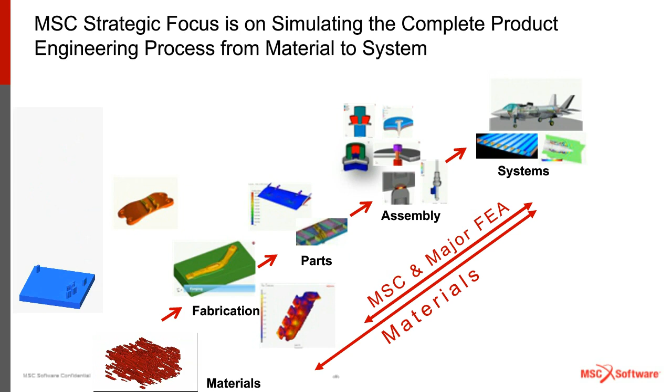Part of MSC is part of Hexagon Manufacturing Intelligence, and so we understand that the comprehensive AM workflow is not just building a part, it's not just designing a part, it's not just testing a part, but it's several steps that have to be taken consecutively, and as well with iterations, including developing the part, the topology optimization, selecting the right materials and machines, having the part printed right the first time, as it's called, also being able to then consecutively or consistently print those parts or build those parts to be able to achieve quality parts over time, and then also being able to measure accurately and consistently measure and then track the data that goes along with that.

To be able to validate that what is designed is truly as it's being built. And in the center of the wheel, you can see all of this is tied together with a material data management process. It's very important.

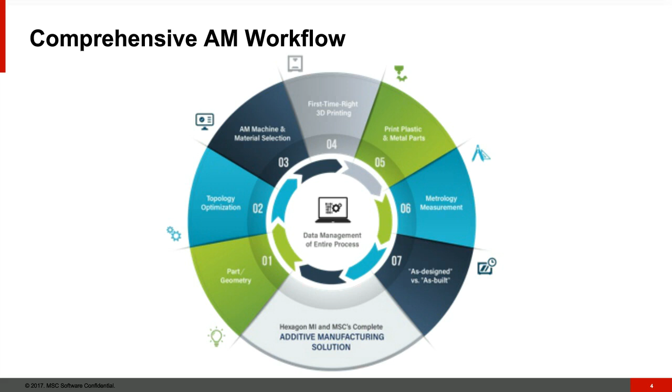Within Hexagon, the intent is really to combine all these best manufacturing technologies, and the simulation aspect fits into this loop. As part of this process, you start with CAD, then go through engineering, design, development, simulation onto the manufacturing process, which is covered by some of the other products offered by Hexagon, through validation, and ultimately through controls, statistical analysis, etc.

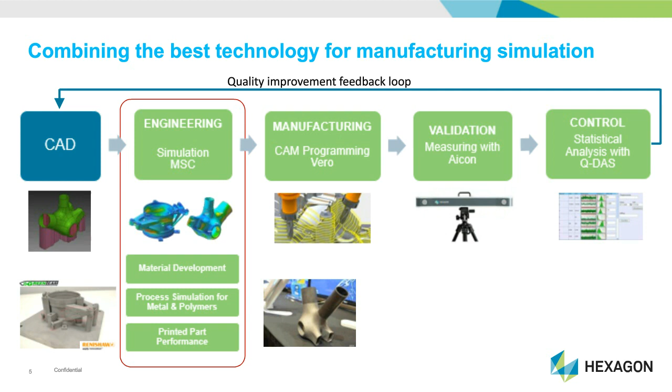Very brief background about SIMUFACT itself. SIMUFACT is short for simulating manufacturing. We focus on manufacturing process simulation for metal manufacturing processes, including metal forming, welding, and additive manufacturing, specifically focusing on powder bed fusion at this point in time. Development is still done primarily out of Hamburg, Germany.

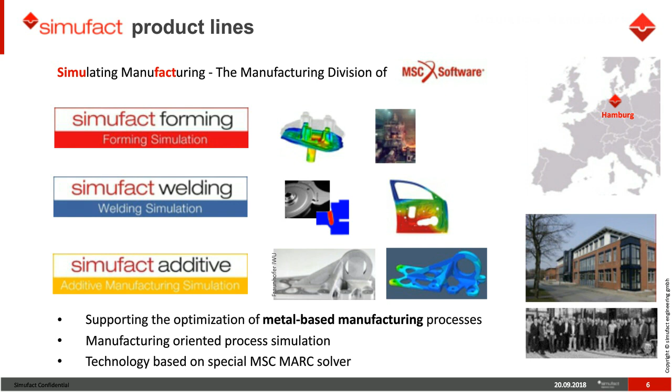Olivier, if you'd like to give a background on e-Xstream. Hi, this is Olivier from e-Xstream Engineering. I'm the business development engineer for additive manufacturing. e-Xstream Engineering is the material modeling company, about 60 people, essentially PhDs, all very focused on advanced material modeling. Our headquarters are based in Belgium and Luxembourg. We are developing Digimat, a platform made of different tools and solutions to model plastics and composite materials. We are the global market leader in multiscale modeling, with a very broad market leader position in automotive. We're working with most of the material suppliers on the market, and we're part of MSC Software and now of Hexagon.

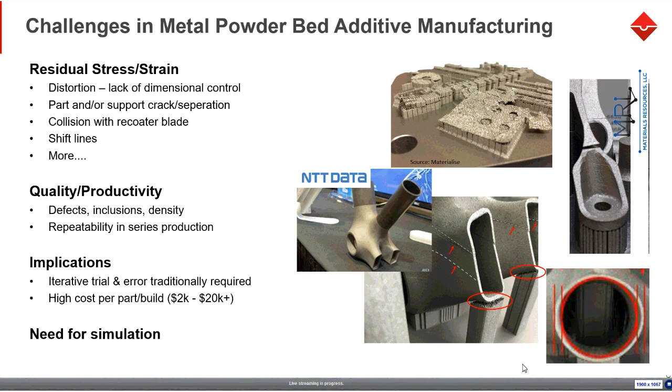Some key considerations within additive manufacturing process simulation, there are a couple of important aspects I wanted to highlight today as they pertain to SIMUFACT additive. The first is that SIMUFACT additive covers the comprehensive AM process chain simulation, in that we go through more than just the build, and I'll get into that in more detail. Secondly, ease of use, learning curve, and modeling time. Then followed by the calibration of the simulation to a physical build, based on empirical data.

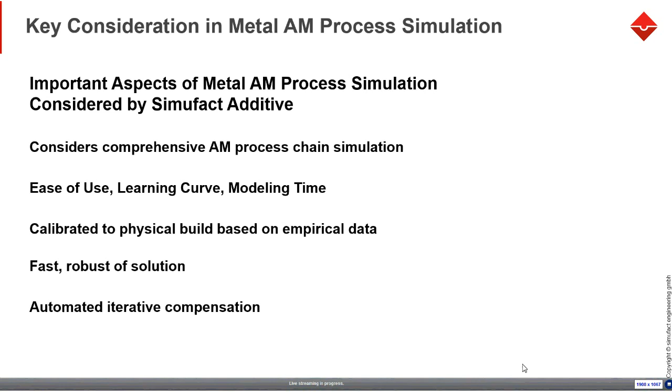That, combined with the fact that it's a very quick, fast, and robust solution. And finally, one of the more recent developments, the capability to utilize an automated iterative compensation routine to get your parts to the final desired, compensated geometry very quickly.

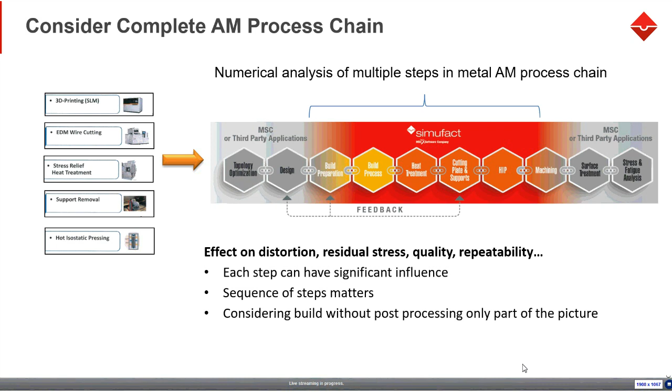So first off, we want to talk a bit about considering the complete AM process chain. We understand that the AM process is comprised of a number of different steps, and we can model several of these numerically. So not just considering the build, but also the unbolting or unclamping, the heat treatment, the cutting of the base plate supports, subsequent heat treatment and HIP steps, and then also the process that occurs after that. All these things can have a significant influence on the final part shape, and considering the build without post-processing is really only part of the picture. Oftentimes I say, I don't know a whole lot of parts that are very useful while they're still attached to the build plate.

So first off, considering the comprehensive AM process chain, as I mentioned: build, followed by unbolting, stress relief, cutting, support removal, as well as additional heat treat processes.

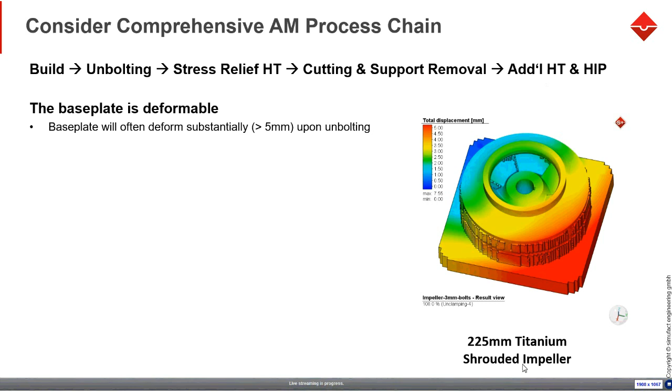This is a real phenomenon, validated by folks who actually built these parts. Secondly, you can't neglect or ignore the heat treat process. Parts change shape as a result of heat treat. They expand as you start to build and heat treat them, and after cooling they're not always fully annealed. The parts change shape, and by the time they expand and contract back down, they're not necessarily the same shape.

This is also affected by the fact that you may have a different material for the base plate versus the powder. A realistic example based on our practical experience with customers is a 1045 base plate with an Inconel 718 powder. This also enables us to optimize the heat treat schedule. Here you can see an animation of the part going through heat treatment. The stress relief has taken place, and as it cools down you'll see a significant stress propagate at the base plate. This is a result of the delta between the thermal expansion coefficient of the 1045 and of the Inconel.

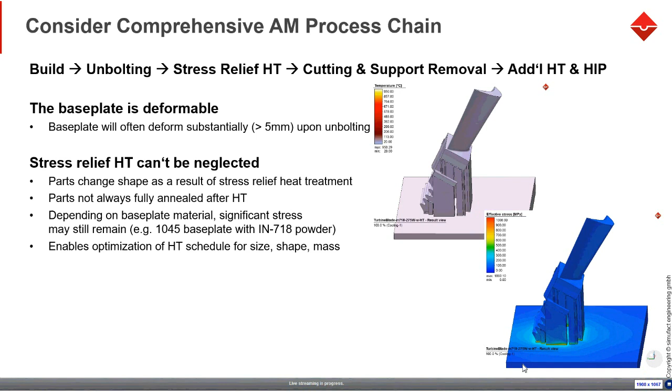Finally, the cutting and support removal. This is especially important when you're cutting prior to stress relief, which can result in significant deformation depending on how you cut the part. If you cut left to right, right to left, front to back, or some other way, it can affect the final deformation. You'll have localized plastification that's different depending on the direction of cut. This is also especially important for hybrid additive manufacturing machining applications that are becoming much more prevalent.

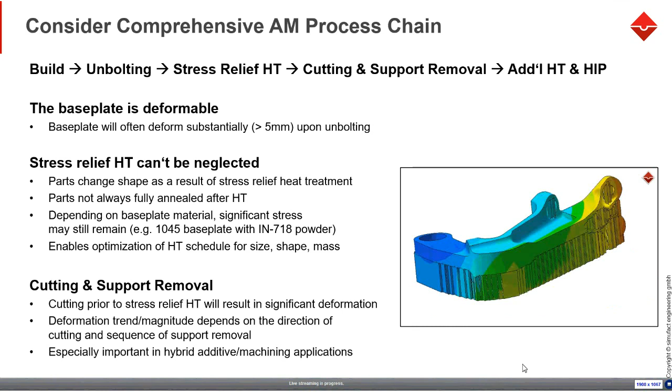Next we wanted to talk briefly about ease of use and modeling time. Our standpoint is that the ability to use this solution quickly and effectively, without requiring a specialist in CAE with a PhD in computational methods, and without having to de-feature the geometry or clean up the model, will really enable this technology and accelerate the modeling process.

In this case, we routinely see that we can model a process in 5 to 15 minutes.

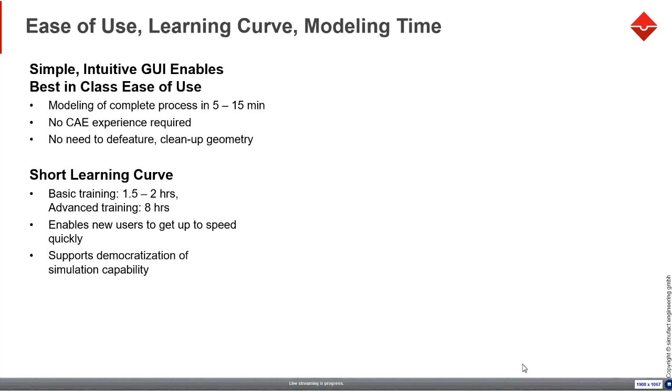Also a short learning curve. Basic training is usually a WebEx with me for about an hour and a half, and advanced training beyond that is another 8 hours, give or take. Some people never get it, and some people do, either by WebEx or in person. But this really enables us to get users up to speed quickly and supports the democratization of simulation capability. It makes it so that people close to the machine, with no experience in CAE, can readily utilize the tool.

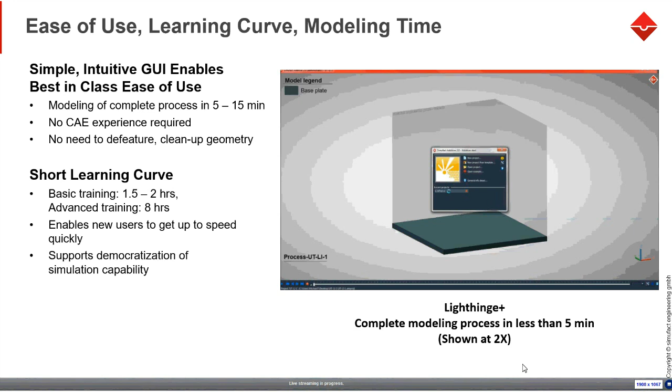Now I wanted to show you a very brief animation, about 2 minutes long, which will show that the modeling process can be completed in less than 5 minutes.

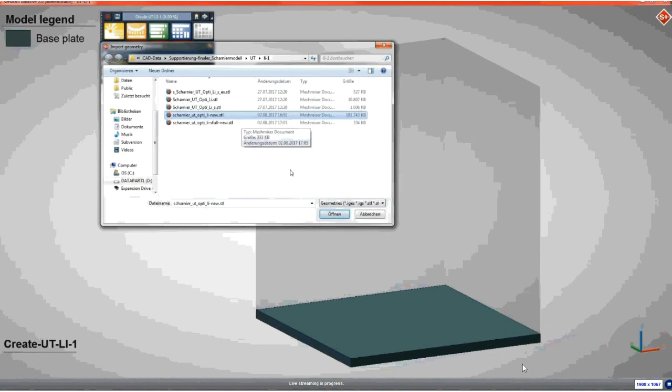So we're going to go ahead, starting with a brand new process, changing the name of the process, changing some of the setup parameters, changing the machine, and importing the part. You can use pretty much any kind of format to import the part.

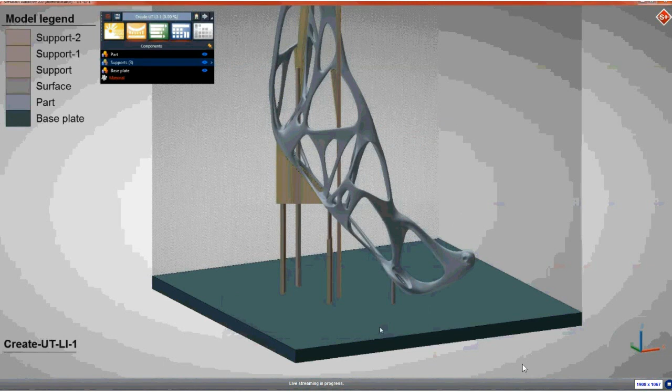The next step is positioning the part, and then importing the supports, or we could generate the supports organically within the software. It doesn't matter whether you're using your own supports generated in Materialise or generating the supports within Simufact. We can also consider the deflection and the thickness of the base plate.

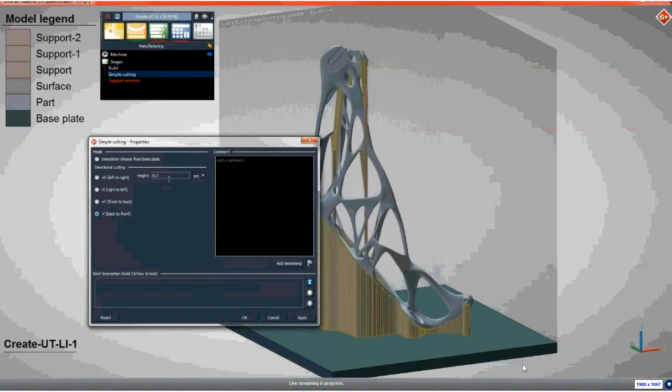Here we're selecting the powder. The next step is to apply the build parameters, the cutting parameters, and the support removal parameters.

Next step would be to create the voxel mesh, or the finite element mesh. In this case, we're using about a 1.5 millimeter voxel mesh. This takes between 10 and 30 seconds typically.

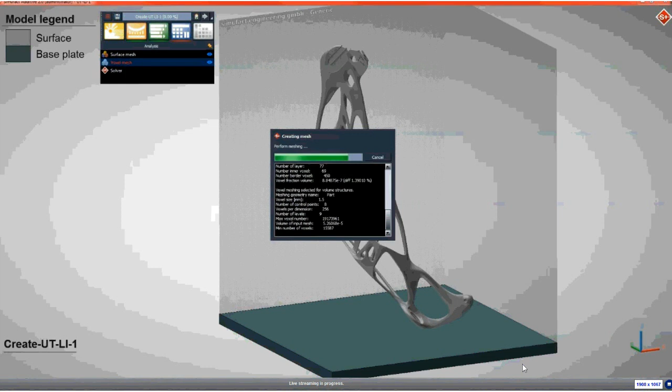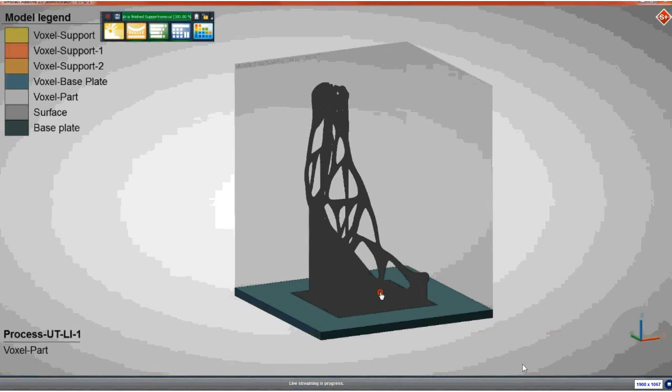Once we have the voxel mesh, you can go ahead and kick off the run. We'll talk a little bit about the solve time after that. You can see the detail of the voxel mesh applied. It's important to note that we're able to utilize a voxel mesh that's relatively large by comparison, and some of the numerical approaches we take allow us to use a larger mesh, which also supports solving these models very quickly.

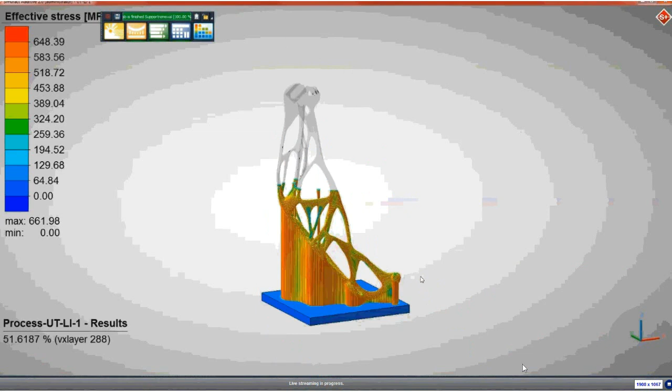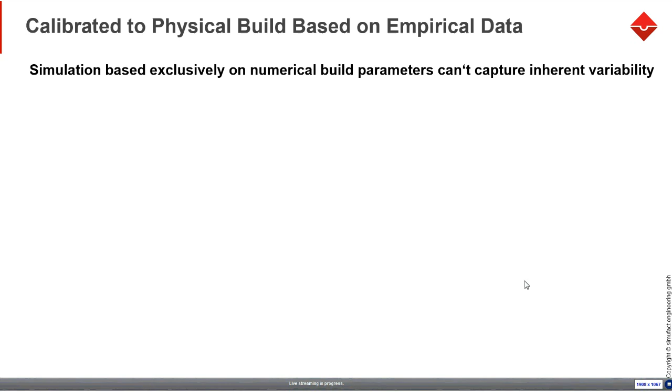The next thing I wanted to discuss was calibrating the simulation to a physical build based on empirical data. You might hear, oh, I have to create these coupons, and that can be a pain, but in reality, simulation based exclusively on a numerical analytical approach really cannot capture the inherent variability of the process. Some way to ground it in reality is critical.

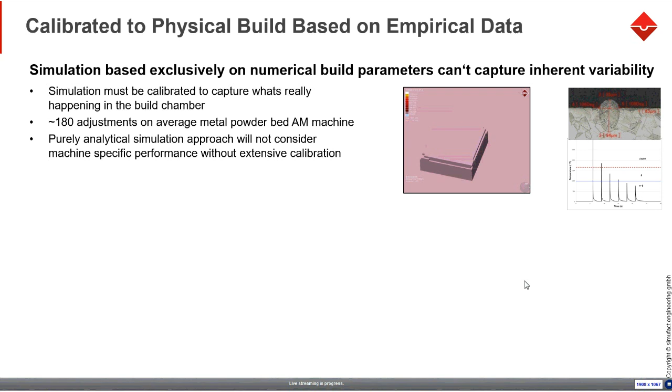With a typical AM process machine, you've got 180 plus adjustments, and the machines change over time. The analytical approach won't be able to consider machine-specific performance without extensive calibration. This is why we prefer physical test-based calibration. It's the fastest, most accurate method, and it considers everything that occurs within the build chamber. We validated this to upwards of 95% accuracy in blind studies with industry partners, companies you've heard of.

It's a simple process of building, measuring, cutting, and measuring again. It considers the micro variability that's inherent in AM, and that's one of the things that makes it very difficult.

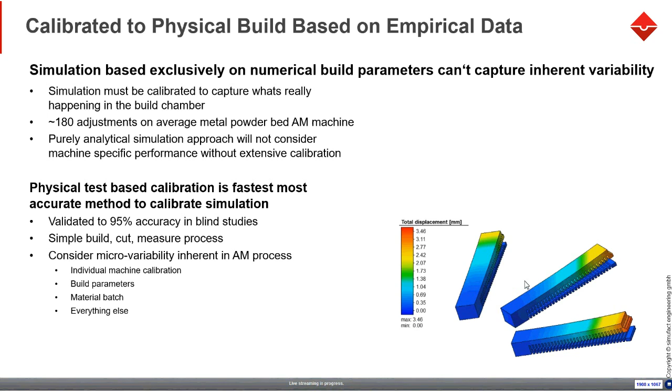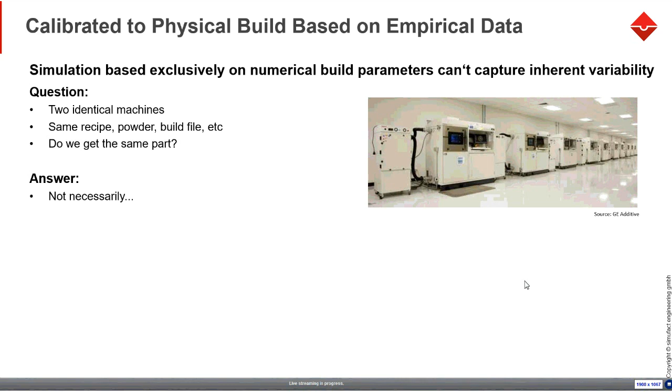What about the same part and recipe combination on two different machines in two different locations, an EOS and an SLM? What about an EOS in the US, SLM in Europe? Will you get the same part then? Probably not. But this empirical calibration is what enables us to build the same part across multiple machines and locations.

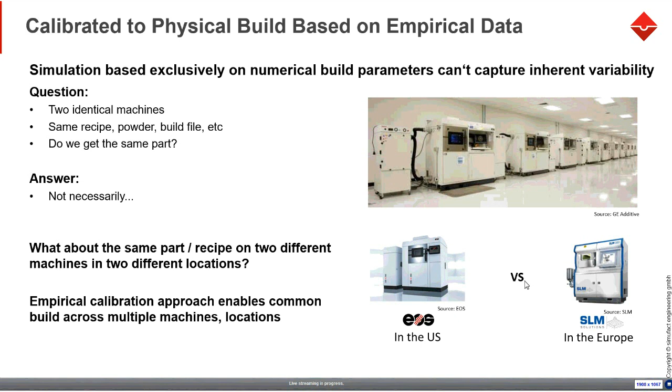I also want to discuss the speed and robustness of the solution, capable of solving very large realistic models. And I say very large—what is that? Something that would occupy the entire build space of an M400, an STL greater than a gigabyte with 1 millimeter size features. It can handle that kind of very large part.

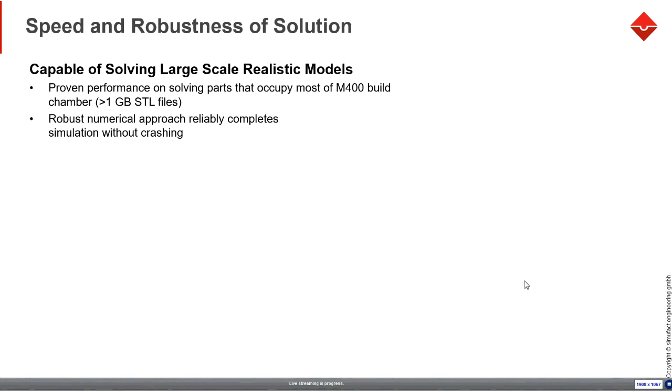This simulation will solve routinely without crashing. It's very robust in that respect, and quickly solves realistic part level simulations. A lot of times we'll see a simulation and people ask, how long did that take for that 1 centimeter, 2 centimeter part? Well, in this case we're talking small to medium parts, maybe 100 to 200 millimeters, solving in 15 minutes to an hour, including build, heat treat, cutting, and support removal. Large models, most of a 250 millimeter build space, take 4 to 24 hours.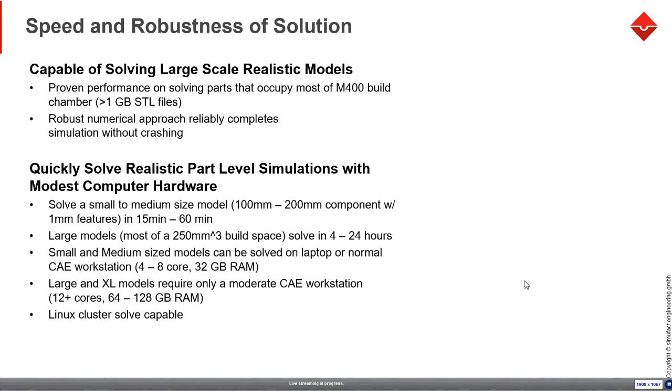Small to medium models only require a laptop or a moderate small CAE workstation. I solve all my models on a 4-core, 32 GB RAM laptop, and it works just fine. For very large extra-large models, you need 64 to 128 GB, and it's also capable of solving on a Linux cluster. Here you can see an example.

Again, I ran this on my laptop: a 260 millimeter Inconel turbine blade, the same model we saw earlier. Build, heat treat, base plate, cutting, support removal—1 hour, 24 minutes.

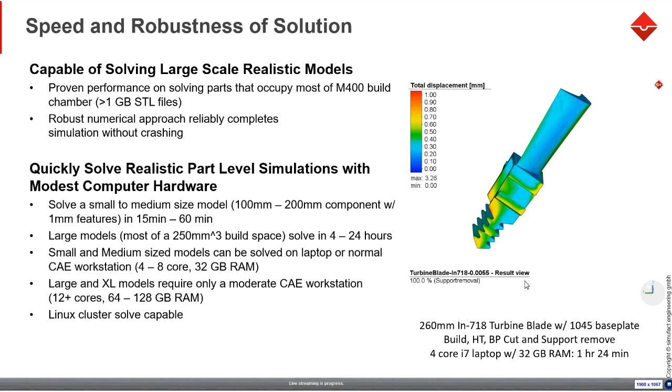The last topic I wanted to discuss is the automated iterative compensation routine. It's my personal opinion that compensation is going to become critical and an enabling capability that will bring metal AM forward. I make it analogous to the compensation of castings. We're able to predict the optimal shape, and in doing so, we want to build the part to nominal, rather than trying to build the nominal geometry as we've been doing up to this point.

Some areas within the geometry may require more or less compensation, and this is what drives the need for an iterative compensation process, something that's more than just a one-step approach.

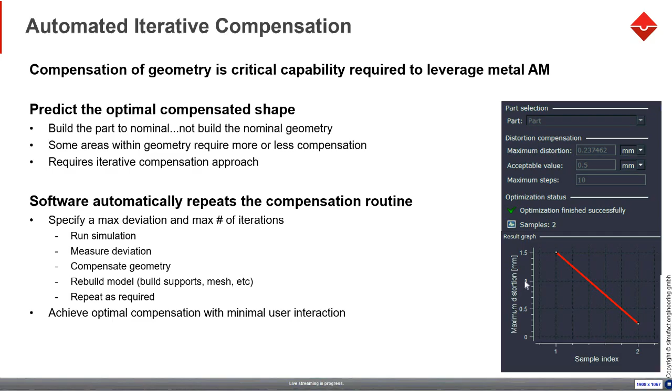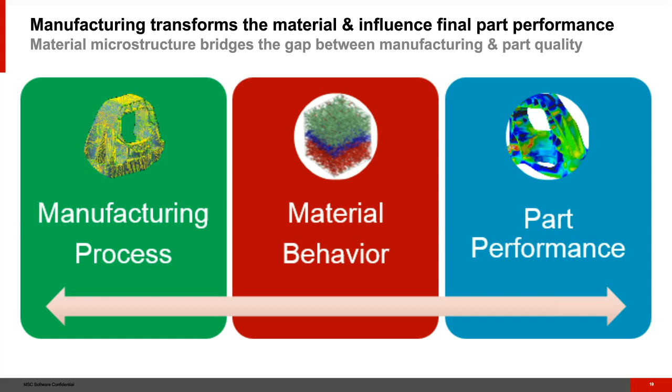We all know that manufacturing transforms the material and influences the final part performance. And so what we've been doing at Digimat for 15 years now is really connecting the manufacturing process with the part performance, via the material behavior and microstructure. Digimat is a material modeling platform to support industry composite-related needs and pains. You can have access to virtual testing, to deduce the composite material behavior based on the different phase material properties. You can ask what if I change the volume fraction of the fibers or of the porosity, how will it impact the mechanical or thermal behavior of the composite materials.

We rely on a very large material database, Digimat-MX. We're working with most of the material suppliers to build material models and exchange them between material suppliers and end users. We have different types of mapping solutions to transfer information from mesh A, from process simulation, for instance, to a mesh B, the CAE mesh. And we are interfaced with most of the FEA solvers on the market, MSC Software solvers like Marc or Nastran, but also third-party like ANSYS, Abaqus, or SAMCEF. And finally, we developed 2 years ago a process simulation module, Digimat-AM, to deduce the level of warpage and residual stresses of the part.

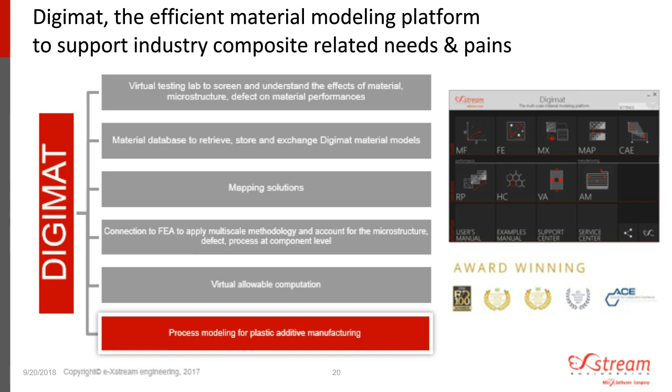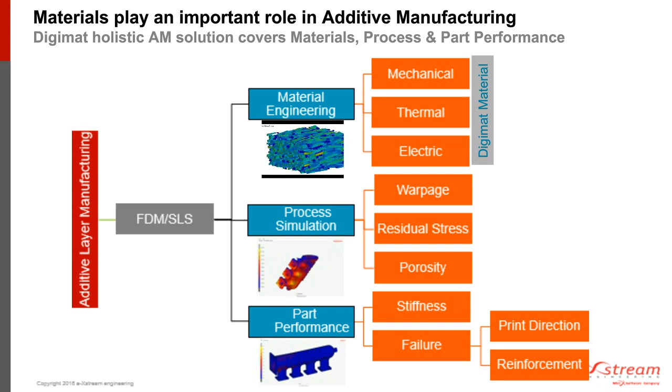So our solution is based on 3 building blocks: material engineering, process simulation, and part performance, because there is a very strong link between each of these, and for additive manufacturing, materials play a very important role. The aim of material engineering is to predict the mechanical, but also thermal or electric material properties, because we are heading towards multifunctional parts with additive manufacturing. Process simulation for FDM or SLS processes aims at predicting warpage, residual stresses, but also the as-printed microstructure such as porosity or related effects such as crystallinity. And by combining material engineering with process simulation, we can predict the end part performance, so stiffness, but also failure, which is often print direction or reinforcement dependent.

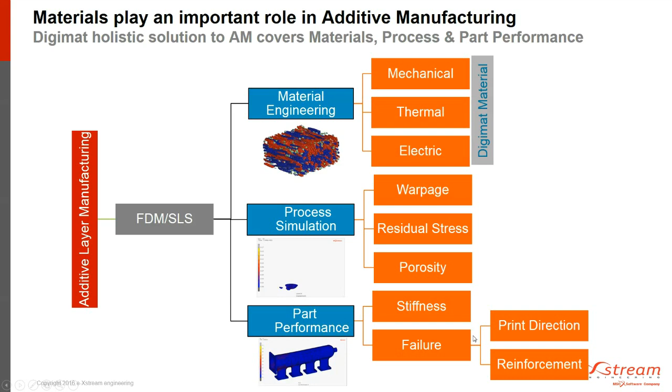We have developed very advanced material models for injection molding, but also for additive manufacturing, where we account for the specific and complex microstructure resulting from the additive process. We have built up the mechanical behavior of lattice microstructures, and we are also investigating multi-materials such as Stratasys PolyJet, where we can directly deduce the overall stiffness of the material depending on the volume fraction between a very soft material and a very stiff one.

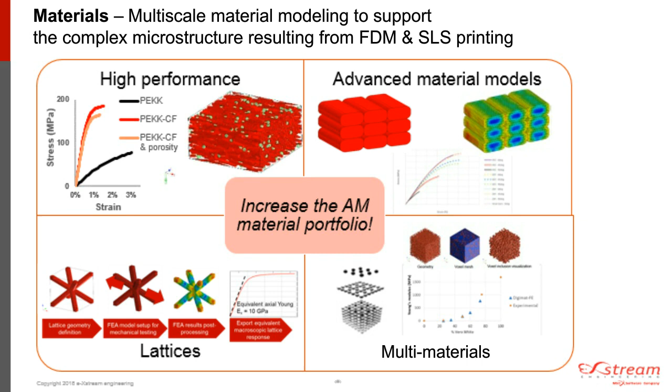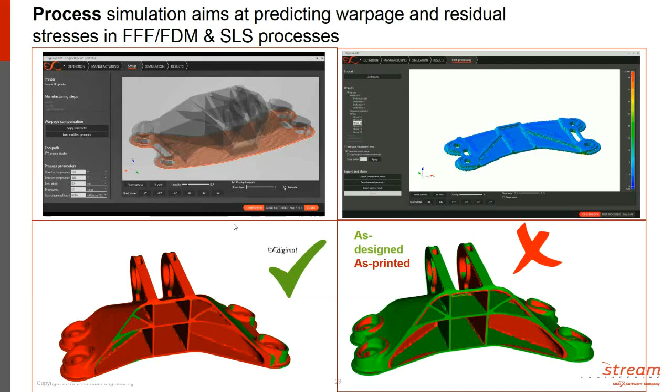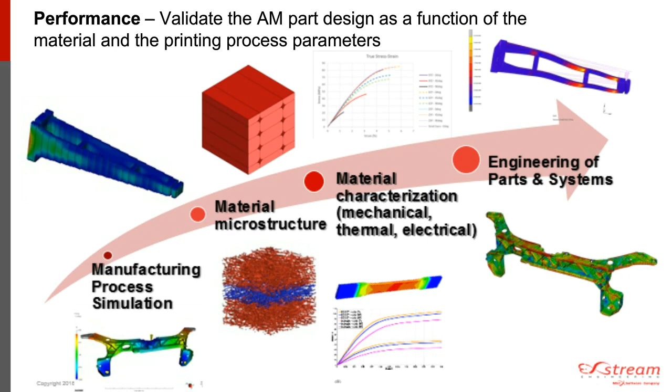So e-Xstream offers a unique database. So for injection molding, compression molding, and other types of processes, we are working really with most of the material suppliers. But for additive manufacturing specifically, we've been working with Solvay and Stratasys to develop some material models of different grades in FFF, like we do with Solvay KetaSpire. So this is a PEEK material.

But in FDM with Stratasys, we've been working at characterizing the Ultem 9085 that has been certified for aerospace, and also on the 1010, which is more dedicated to toolings. And with Solvay, we've also been working on the Sinterline grade for SLS process. Finally, we've been capable to characterize the Fortus 900, which is probably the largest FDM build size on the market, and that has a specific package for aerospace certification.

In the near future, by the end of the year, we will have additional grades coming from Solvay, Stratasys, and probably also more material suppliers, and some of them will then be loaded with carbon fibers or glass fibers.

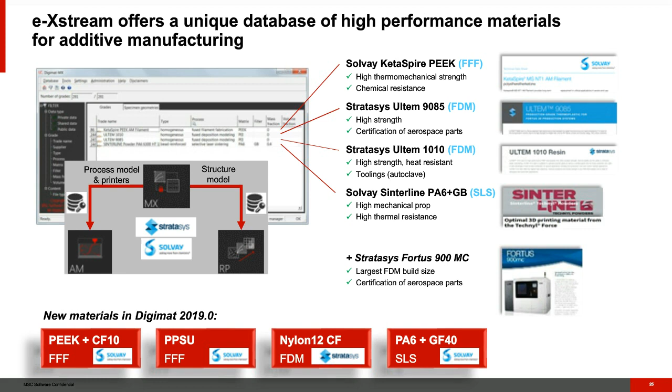So when we released our first Digimat version, we had a solution based on the inherent strain approach. This is very similar to what Simufact is proposing. So it's proposing essentially a very good compromise between accuracy and speed, and is essentially answering the question: will my build print right the first time? So what is the overall warpage trend, etc.

Now, with the latest release in July, we've enabled advanced solver simulation, which means that you can now perform a full simulation, thermal analysis or thermomechanical, taking into account all the different local features. For that, for instance, we can have a very detailed local thermal impact of specific areas, have some specific toolpaths like lattices, for instance, or predict the level of crystallinity in the part. So this is really the type of study that is ideal to first understand and then optimize the process, for instance, with the degree of crystallinity in the part, before physically printing the part.

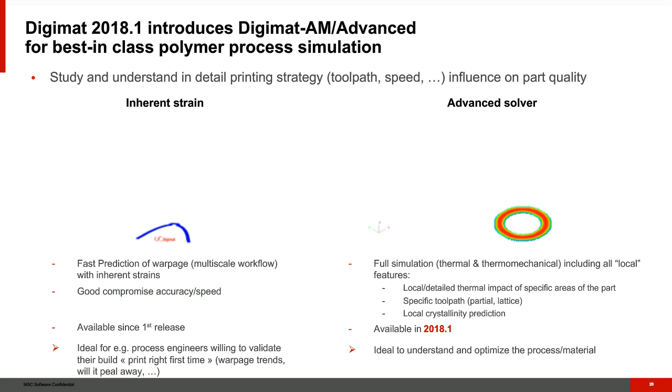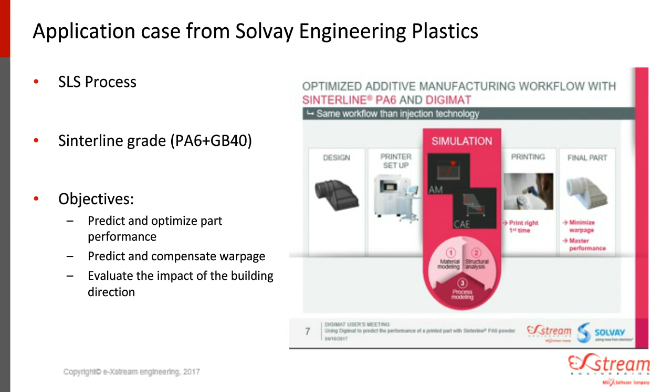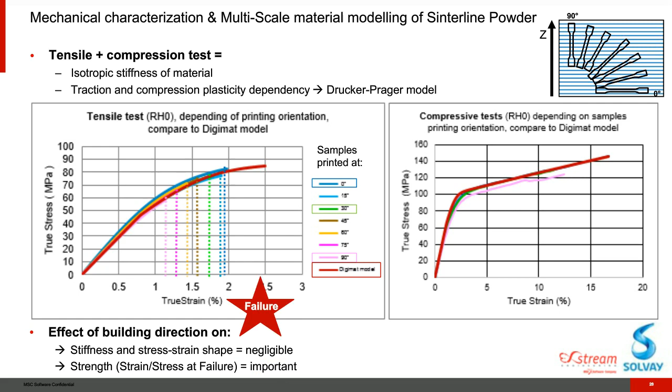So what we do is we characterize experimentally the mechanical behavior. We fit a Digimat model through the different curves, and what we can see is that essentially the building orientation doesn't really impact the stress-strain shape. But it does have an impact, and this is on the failure, so that the failure happens at very different values depending on the building direction. And so this is why we had to develop a new specific failure indicator that is aware essentially of the building direction.

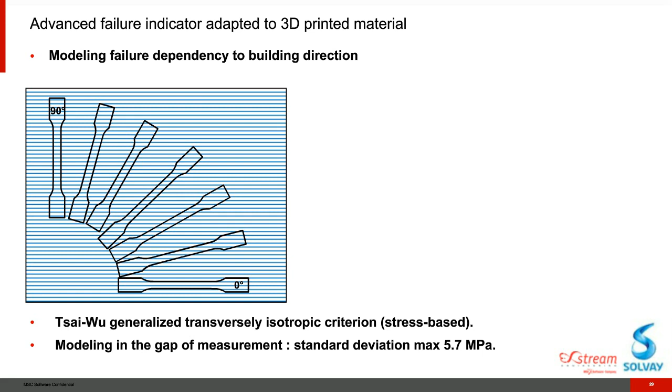To develop this failure indicator, we will reuse the different dumbbells printed and tested at different orientations, and we will then show that indeed we are capable, compared to the experimental curve in blue, to fit a Digimat model of the failure, and indeed we are decreasing progressively the maximum strength of the material with an angle that is increasing. So the worst condition, of course, in this case is when you print the dumbbell vertically.

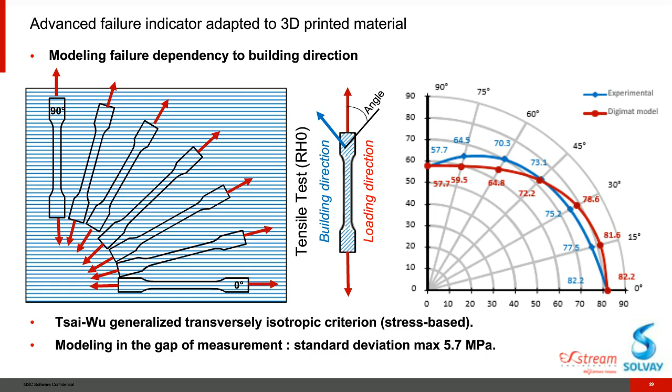Now that we have characterized the mechanical behavior of the material, we can perform structural analysis to deduce which orientation of the part is giving us the optimized performance. So in this case, it's the burst pressure, so we have to sustain the maximum level of pressure that we can, and to this end, we will see this animation that gives us the evolution of the maximum pressure that the part can sustain in function of the building angle. So from these results, we see that there is clearly a preferential angle at 0 degree or 180 degree by symmetry.

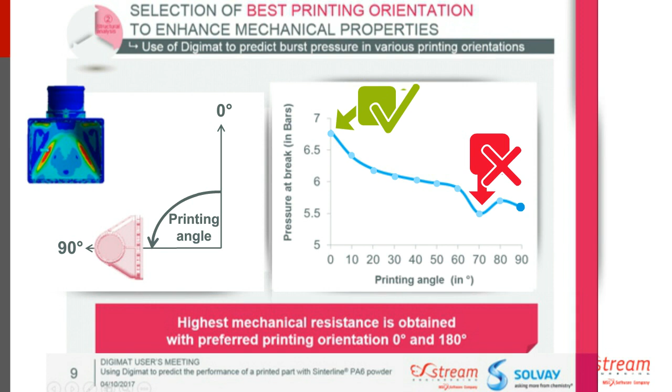Now what we have to do is to check that the design accuracy will be satisfied during the printing. So this is where printing simulation occurs, of course. For that, we will print the parts at the two different orientations, 0 degree on the left. So this is the animation that is played now, and 180 degree just afterwards on the right. There is one specific area of the part that we want to investigate, and this is the sealing area at the very bottom of the part.

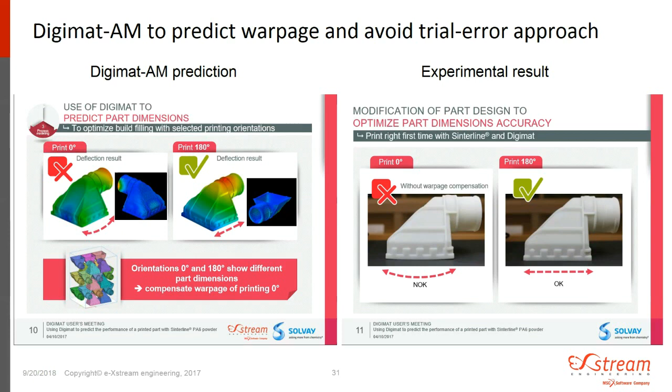And so when we print it at 0 degree, we can see that there is some warpage, as demonstrated experimentally on the right slide. So this is the famous banana shape that we have when we print a plate within the build. While when we print it at 180 degrees, essentially the first build is already correct. So we'll then use Digimat-AM to perform the process simulation and use those first results to compensate the warpage. And so on the right now you can see the updated results at 0 degree, where we have decreased most of the warpage that was existing on the first build.

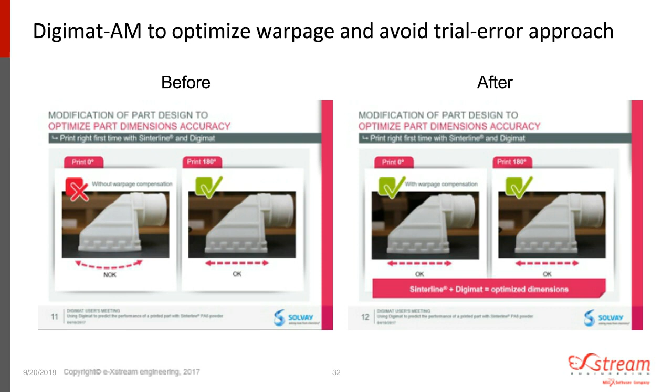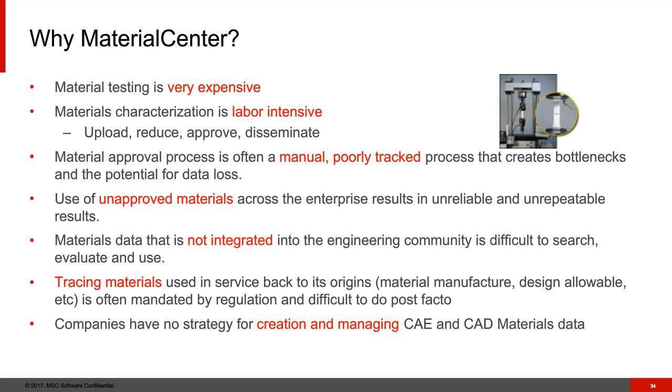I will now switch to MaterialCenter. MaterialCenter is essentially a tool that has been developed to address a given number of pains when we discuss material testing with a company. The first, material testing is very expensive and it's also labor intensive. The approval process is often manual, poorly tracked, and the use of unapproved materials across the company can result in unreliable or unrepeatable results. So all in all, about traceability, about linking all the people together, we want to offer to the market a material data and process management solution.

So for that, we will first start by loading some data. So it can be physical test data, of course, like tensile tests, but it can be specifically for additive manufacturing as well, process data or material parameters. This means that you can really follow up and include all the different data that are associated to the full simulation and the full additive manufacturing process. You can also envision to include some virtual data with Digimat, so the connection with Digimat VA. Once this is done, you can analyze, post-process, and reduce all the data, and all this is sustained by a very specific approval process, meaning that this is really an integrated platform within the company.

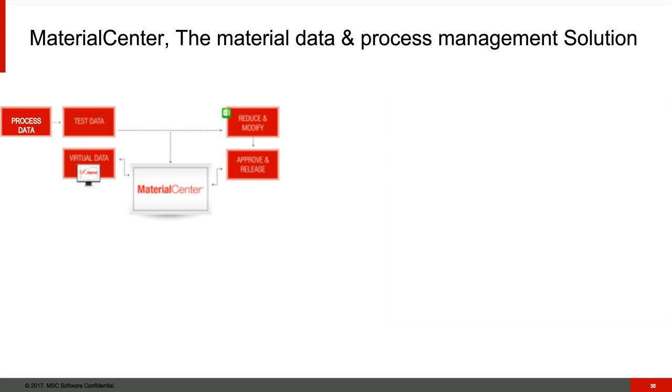Once the data has been approved, we can also start using them. So this is about exporting the data to Excel files. So we have an Excel integration within the tool so that engineers can work directly from the Excel interface, download the data, modify them, publish them, and also create some specific templates.

You can also export the material data for CAD, like CATIA, or for CAE, like MSC Software, Patran, Marc, but also Abaqus or ANSYS. And finally, you can publish the data towards a PLM interface, or just create reports and email the information.

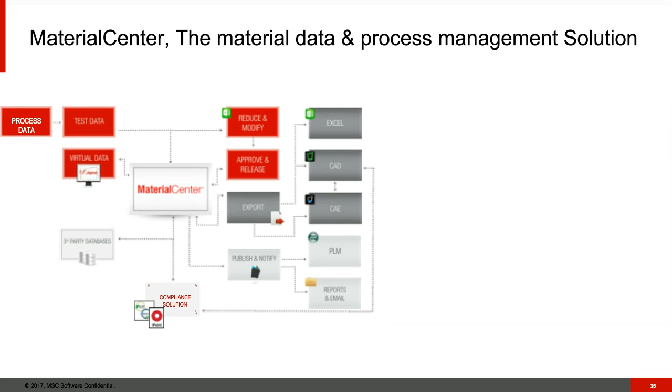Finally, and last but not least, we have a compliance solution. So in partnership with iPoint, we want to be capable to produce data that are REACH compliant. So specifically for additive manufacturing, MaterialCenter will enable you to capture the full AM data, so about the material, about the build, the process, the machine, even the environment of the part, in one unique centralized platform.

Okay? So you can capture the full manufacturing process and ensure consistency and also provide quality indicators. You can also compare with virtual data or with different scanning devices data. And finally, you can also provide AM and non-AM data sets for process benchmarking and comparison.

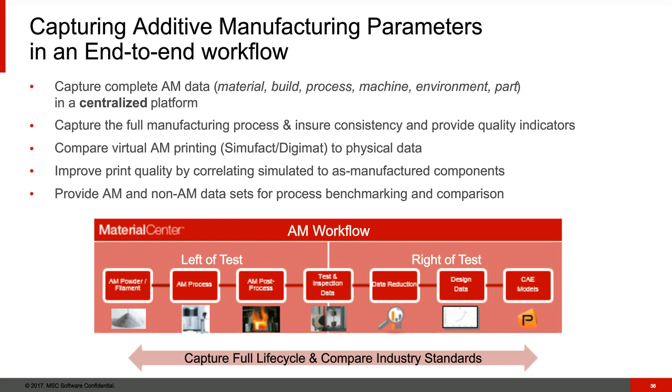This workflow has been successfully applied with the US Army. And so essentially, their need here is really to optimize the additive manufacturing parameters to produce reliable, field-worthy components. And to do that, they wanted to have traceability. So they want to make sure that they are tracking for each build the machine information, the material that they've been using, the properties, and so on.

So that afterwards they can review all this data, compare them, analyze the trends, and finally optimize the machine parameters to produce consistent and reliable components. And moreover, different kinds of templates have been developed specifically for powder bed fusion, for direct laser deposition, and so on.

And so the value that they found here is really to be capable to quickly search across a huge amount of data and different types of batches to find the optimal material properties, details on one specific build, part that has been built, so traceability again, or simply trends in the data, and finally to have more predictable builds to produce consistent and reliable components.

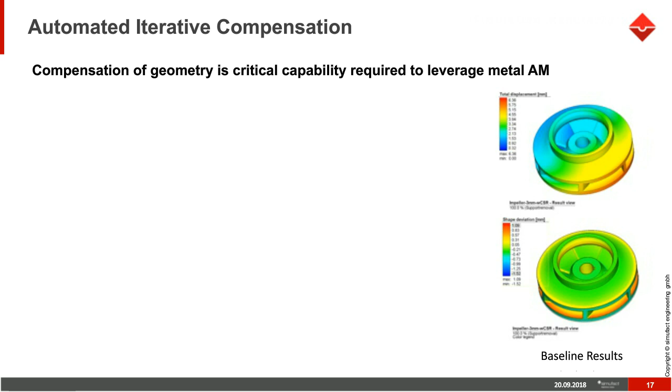Thank you. Another question: what format is required for CAD and supports? From the Simufact Additive standpoint, we are totally agnostic and can take pretty much any kind of format, whether you're utilizing an STL or STEP as a generic file format, or using a SolidWorks file, a Creo file, or anything else in between—we pretty much take all of them.

Great, we have another question: is the Simufact FE approach technical content available to share? I'm not sure I fully understand the question. I'd probably want to touch base with you offline to make sure I understand, and I'd be glad to share some of the technical content.

Is there any place online that attendees can go to find more information, or is it better to just touch base with you? I recommend just touching base with me. There's a lot of material online—you can go to our website—but if you're looking for something specific, I'd be glad to interact directly.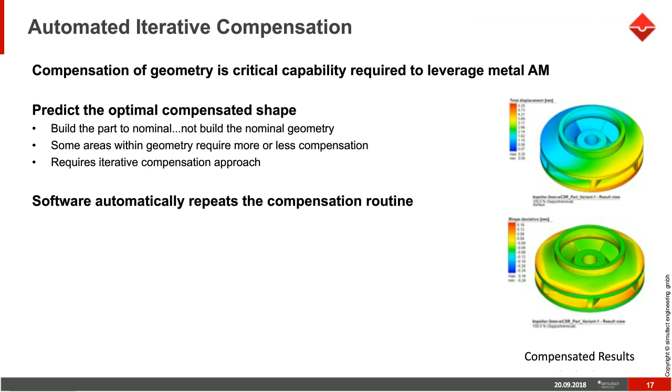As this webinar has shown, there are many opportunities and benefits when MSC software helps manufacturers advance and customize simulation techniques to optimize the design, the print workflow, and determine the optimal process flow at a faster and lower cost.